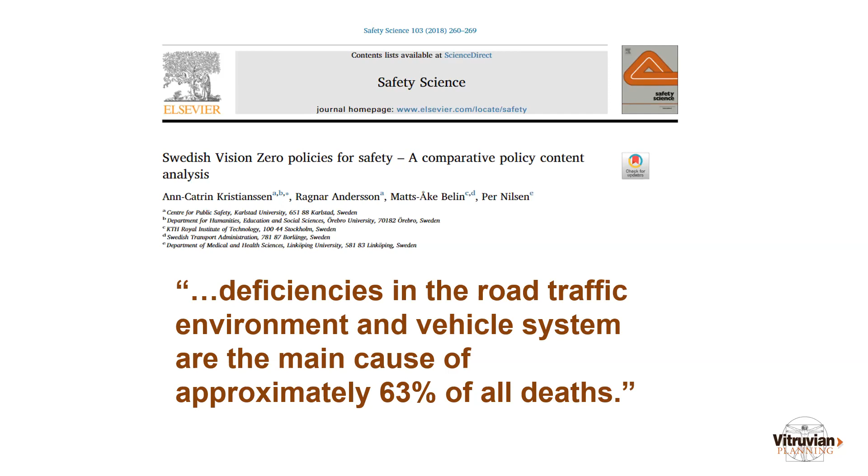And that's what this safety culture is meant to embody. And the science is starting to tell us this. Sweden, which has been a worldwide leader on Vision Zero and reducing traffic deaths, has realized that while humans may make mistakes, if we think we're going to perfect them, then we're fooling ourselves, because they found that deficiencies in the road traffic environment, as well as vehicle systems, are the main cause of approximately 63% of deaths. And when Sweden and the Netherlands adopted design strategies different from the US in the 1970s, they projected that if the US would have adopted it at the same time, our 45,000 traffic deaths a year would be cut in half. And that's what we're fighting and what we're up against.

So I'm going to address this from two different sides, because when we hear highway engineering or traffic engineering, we can confuse them as two things. I'm going to use these terms loosely, because in some ways they intermix. But when we talk about roadway engineering, I tend to think of that as the physical aspects - when we look at this cross section of a road, the subsurface features, things that we can't see, the road base, the drainage, the utilities, all those things that go into that are very much roadway engineering.

Surface features such as the crown of the road, so it drains, how the asphalt is done, and how the concrete is done on a sidewalk, is roadway engineering, as well as our bridges and other structures.

The traffic engineering side is markedly different. While this road may be 5 lanes and a roadway engineer is trying to make sure that those 5 lanes and everything stands up over time, it's oftentimes the traffic engineer or somebody giving input that will give input to the number of lanes, or the width of those lanes, or the widths of sidewalks, or the widths of bike lanes, traffic signals, how signals are timed, how the road is striped, the number of lanes desired, the presence of streets and other street side features, as well as speed limits and design.

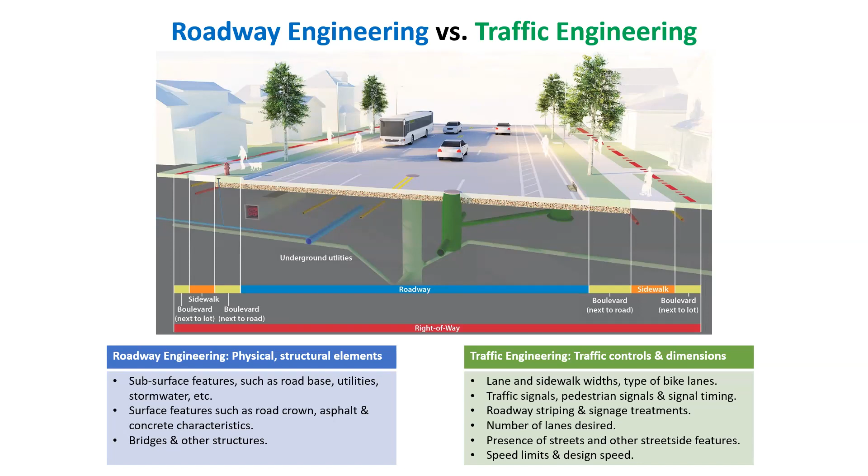And so these are two very different things to understand, because the guidance and policies used to guide the two do vary dramatically. In general, I will say this: the science related to traffic engineering is a lot less substantial than the science related to roadway engineering. And I think that's where we cause a lot of issues.

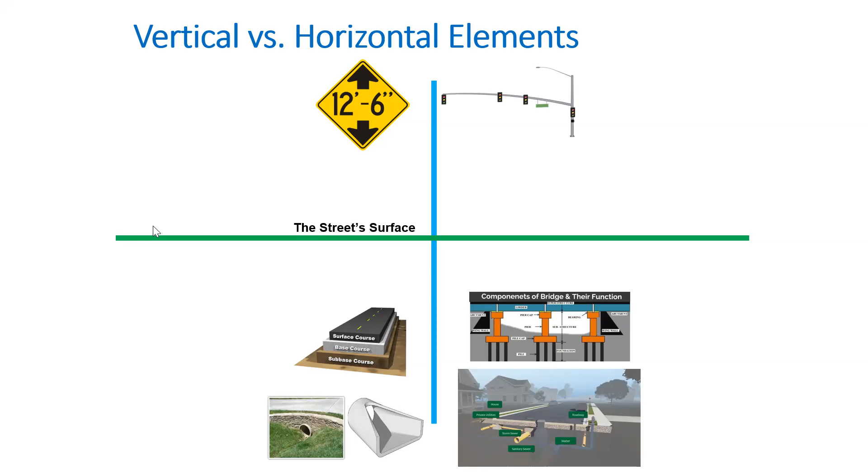And the reason I say that is when we look at the vertical and horizontal elements of a street, how it drains, the components of a bridge, the height of a traffic signal pole - those kind of things, in our world of trying to make things safer for pedestrians, bicyclists, and motorists, aren't really what we're questioning. We're not questioning the railing height of a bridge or the bridge pier or the subsurface base of a roadway. Oftentimes what we're trying to make better is the traffic engineering side of that.

Lane widths that are 12 feet that induce speed and are not compatible with urban or small town streets, or a turn radius at a corner that promotes high-speed vehicle turns and reduces the visibility of pedestrians - those are the kind of traffic engineering decisions that I think we are most focused on. And certainly in things like a curb extension or a raised crosswalk, that's where we get this traffic engineering feeding roadway engineering, and I think where some of the confusion comes in.

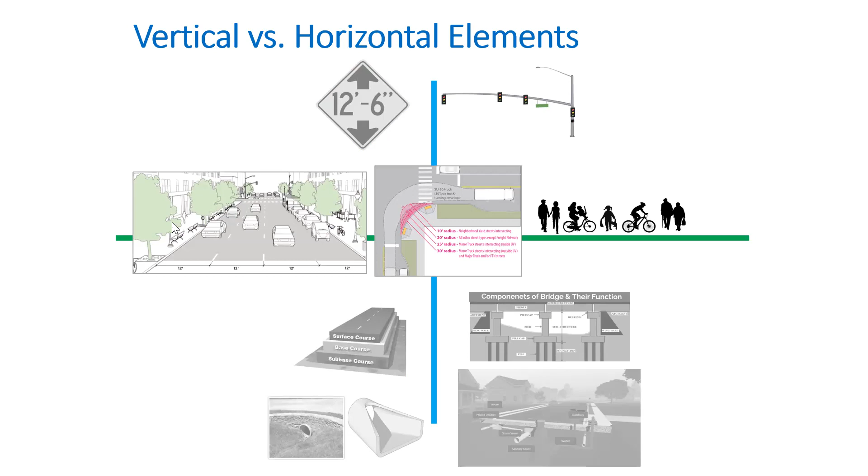So if we look at Merriam-Webster's definition of standard, there are several definitions, but I pulled out two of them. One, a noun, standard: something set up, and this important part, established by authority as a rule for the measure, quantity, weight, extent, and value.

An adjective of that is constituting or conforming to a standard, especially as established by law or custom. I think when we get into discussions, especially with an agency like an ITD, this tends to be how they define that. And when an elected official hears we follow a standard, I don't believe that elected official feels very empowered to question it.

I think this definition of standard and how it's applied by public agencies is used to squash changes or public input or prevent flexibility when ample flexibility is allowed. Definition B, also in the same dictionary, is something established by authority, custom, or general consent as a model or example, and something that might be regularly and widely used, available, or supplied. That, in my mind, is how we should look at things called standards when we do this.

And it's a simple fact. Not one standard developed out of Washington, D.C. for the entire country can address every single situation, but we tend to apply them as if they are.

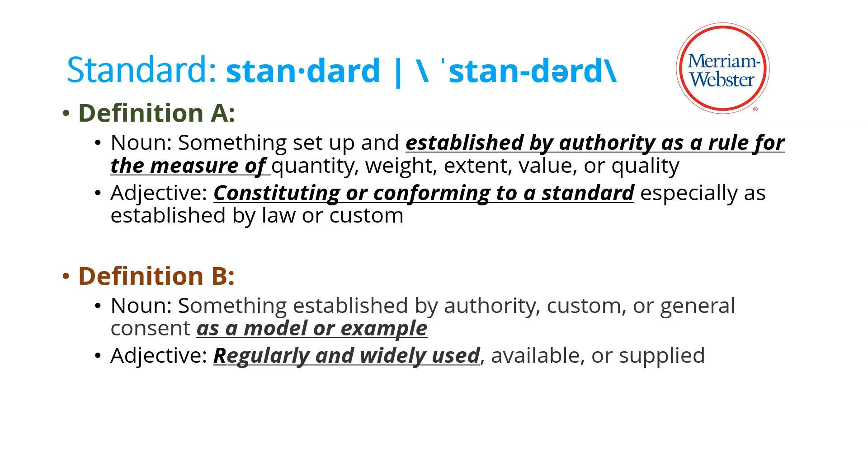So I'm going to start first with something you might hear. Hey, you know, we would really like a narrower travel lane and a curb extension. And you know what, we can deal with congestion for a couple hours a day because we'd rather promote pedestrian safety. And the excuse you might get is, well, we follow federal standards. We can't do that because the federal standards don't allow it.

Here's a little secret. For the most part, there are no federal standards that dictate those things. FHWA has indeed adopted some federal standards for things like interstate highways, which for the most part, we're not concerned with. And they do have standards for the national highway system.

Orofino, you're on US Highway 12. And while yes, that does have some authority there, your downtown and most of your city is not on that. And I'll address some of those issues here in a second.

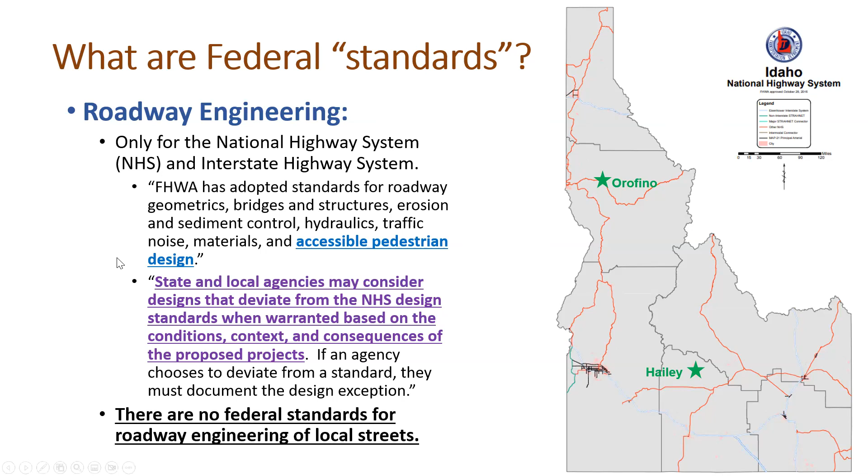From the traffic engineering side, it's slightly different. There is a document called the Manual on Uniform Traffic Control Devices, MUTCD. It is also oftentimes erroneously referred to as a federal standard, and I'll focus on that in a second.

MUTCD does include standards and things that are labeled as standards and things that have the word 'shall,' which is generally viewed as something that is compulsory unless you have good reason to deviate from it. What MUTCD does is it helps ensure things like a speed limit sign looks the same in Idaho as it does in Florida. It helps traffic engineers time traffic signals for at least a minimum standard for pedestrians. It does not prescribe a maximum standard for pedestrians.

And when you look in MUTCD, the very first section says that it contains not only standards, but also guidance, options, and support. And only about a quarter of what is in the 900 or so pages of MUTCD is actually a standard. The rest are things that allow ample flexibility to allow for local conditions and local context to prevail.

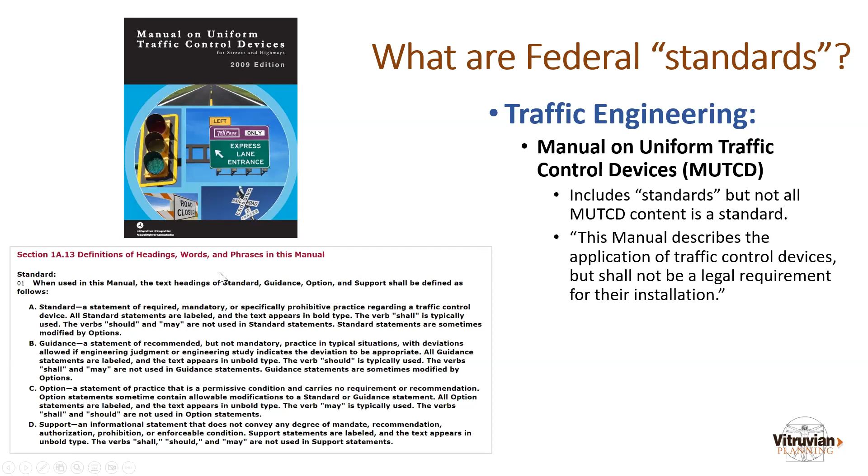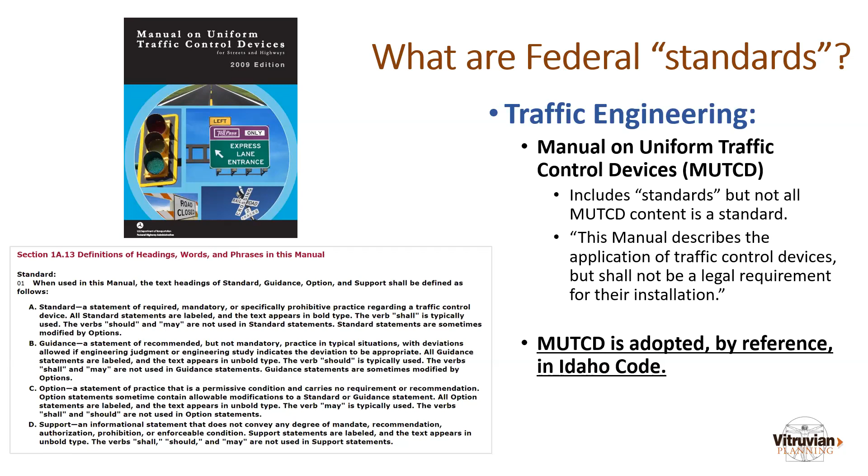MUTCD is adopted by reference in Idaho code, so there is some legal standing for it. It's something local agencies, ITD, and others have to follow, especially when it comes to things labeled as standards. But you'll often hear, we follow MUTCD standards, and as an advocate I would say, which ones? Because there are plenty of other options and guidance that are not standards and do allow for the flexibility you may seek. On the roadway engineering side, you'll also hear, we follow AASHTO standards.

Generally that comment is meant to reflect this document, A Policy on Geometric Design of Highways and Streets, often called the Green Book. It's more than 1,000 pages and covers many facets, primarily focused on roadway design, but it does incorporate some traffic engineering principles into it, and I'm going to cover what that is.

So first of all, who is AASHTO? They're the National Organization of State DOTs. The Idaho Transportation Department's executive director, by rule of AASHTO, has a seat on its board, plus engineers at ITD sit on AASHTO's numerous committees. They publish guidelines and research, including the Green Book I mentioned, but also bicycle and pedestrian guides and something called Achieving Flexibility in Highway Design.

They also do a lot of what's called materials testing, to test the substantiality of concrete and other things that are very important. But let's not forget, AASHTO is a very powerful lobbying organization when it comes to federal policy, federal funding, and how federal projects are done. Don't underestimate the biases that are inherent in that.

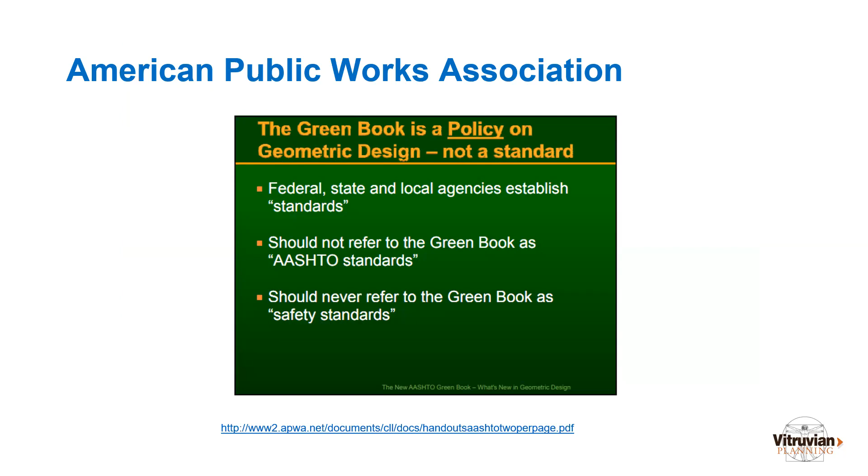This is from a presentation by the American Public Works Association that says it better than I ever could: the Green Book is a policy on geometric design, not a standard. Standards are established elsewhere by other agencies. We should never refer to the Green Book as AASHTO standards, and we should never refer to the Green Book as safety standards. Again, that's not Don Kostelec talking, that's the American Public Works Association.

So where do standards exist? As I said a couple times, state DOTs like ITD and cities like Hailey and Orofino may adopt their own set of standards, which can at times be viewed as inflexible. But the great thing is, especially for a city, we can adjust, amend, and adopt new ones at any time, in a much easier process than even a state or federal level. Many of these standards are based on AASHTO's guidance, but as I found in reviewing them, they're probably outdated, or they do things like use a maximum design value for travel lane widths.

They will default to 12 feet on a travel lane width, but oftentimes default to the minimum width for a bike lane or a sidewalk.

This is why I oftentimes push back at ITD or other agencies when they say, well, we don't have any money, and that's why we're building the 5-foot sidewalk. Well, if money was truly the problem, and you have to build a minimum sidewalk, why are you not also building a minimum travel lane?

Why are you not building minimums in other facets of the road? Why do pedestrians and bicyclists get relegated to the minimum while oftentimes they build the maximum for motorists? That's a bias, not a standard that we've applied through many of these things.

It's also likely that the AASHTO bicyclist and pedestrian guides were not incorporated into a city or state DOT's design standards. And I'll give you an example of this later as it pertains to ITD.

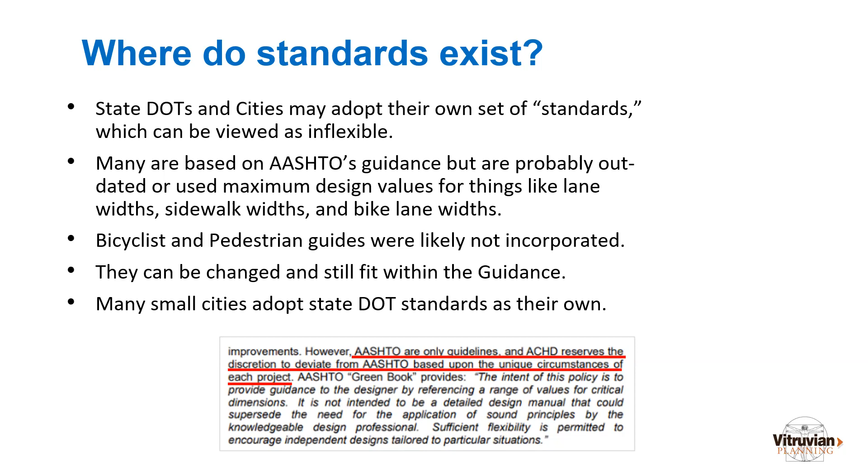It's not saying a value in there is necessarily good or bad, but there is ample flexibility and we can do a lot better job applying that.

State DOTs, not just Idaho, misuse that term. This is an excerpt from a state DOT's design manual in another state where they say critical design elements not meeting AASHTO standards require an exception. And these critical design elements are, you can see there. That's a misuse of the term.

In this city design manual, and this is a city I would hold up as one of the better ones from a pedestrian and bicyclist standpoint, they still erroneously use the term standards when applying to AASHTO elements when it's not. So don't think that Idaho is alone or unique. This is an industry challenge.

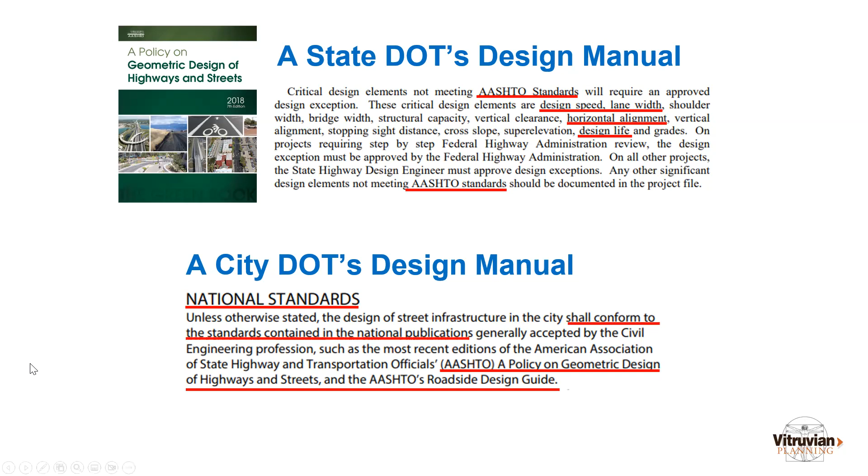So let's look at this based on what you've learned. ITD's Roadway Design Manual. Just Google that and you will find all 500 or so pages of it in all its glory. So tell me, all work performed on interstate pavement preservation projects must meet AASHTO standards, but other previously built areas of the roadway do not need to be brought to current standards. Is ITD correct in this instance using the term standards?

Yes, they are, because the Federal Highway Administration has specific standards for interstate projects. However, there's also an entire manual on how agencies like ITD can get design exceptions for the interstate highway system. So even what may appear to be written in stone is not written in stone.

Elsewhere in the ITD Roadway Design Manual, not pertaining to interstate highways, recommended roadway widths based on completed corridor plans or by applicable standards. The request for a width design exception to AASHTO standards cannot be solely based on this justification. This is an incorrect use of the term AASHTO standards because it is not in reference to an interstate highway or national highway system. It's reference in general.

So if you're an ITD project engineer who doesn't get to design this manual and you're assigned to a project in Hailey or Orofino and you see this, are you going to feel like you're empowered to be very flexible in addressing that? Probably not. And that's where the problems tend to lie.

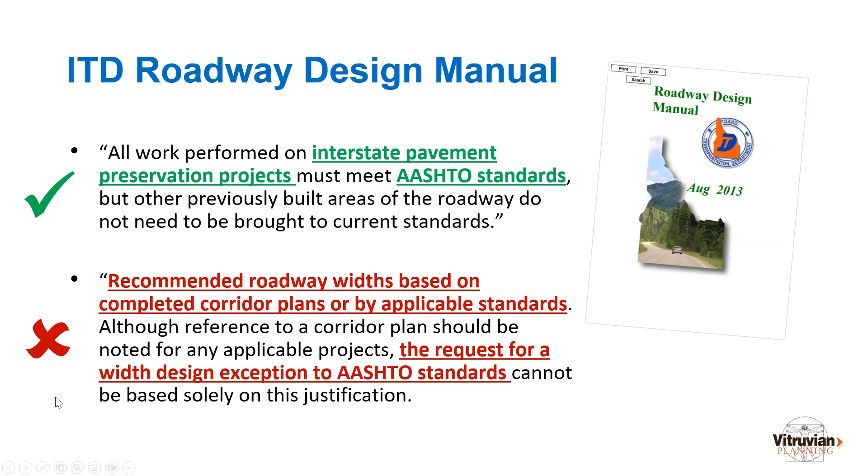So let's go back to AASHTO. If we think of a standard as using the word 'shall,' which makes it compulsory, consistent with what I said with MUTCD, I'm lucky enough that I have a PDF version of the AASHTO Green Book, and I can do a search within about a minute across all 1,000 pages.

And here's another little secret. The word 'shall' does not appear anywhere in the 1,000 pages of the AASHTO Green Book, which is why calling this AASHTO standards is simply incorrect. So let's look at what the Green Book does say that can help us reach our goals.

This policy is not intended to be a prescriptive design manual that supersedes engineering judgment by the knowledgeable design professional. A single book of 1,000 pages cannot dictate every circumstance on a street in the United States. Projects on existing roads particularly call for a flexible performance-based approach to design, and the policy encourages flexible design.

They even admit that in the past these things were applied too rigidly. The last sentence underlined: traditional applications of this policy took the approach that if the geometric design of the project met or exceeded specific criteria, it would likely perform well. Well, got news for you. Most of our highways have conformed to this in some form, and we still lead the wealthy nations of the world in traffic deaths. So have we accomplished our goals for safety by rigidly applying this?

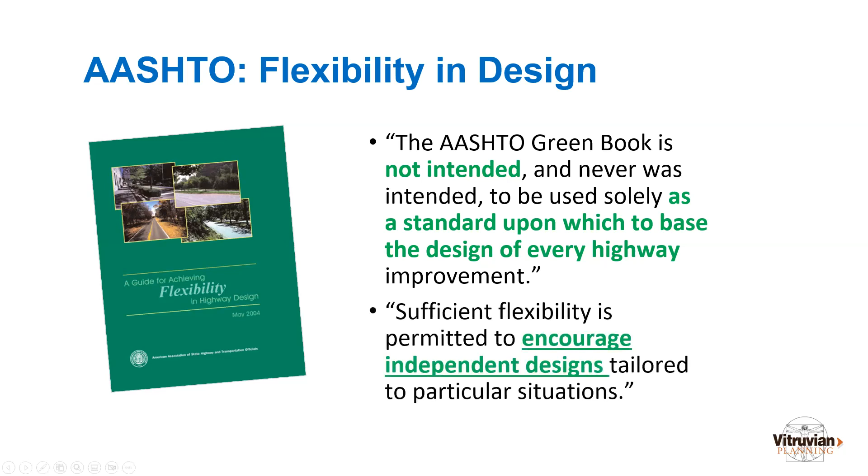I say no, as does AASHTO. AASHTO had to go out because their own Green Book was seen as so inflexible, and publish another 140-page guide to explain how the Green Book is indeed very flexible. This is a quote from this flexibility guide: the Green Book is not intended and never was intended to be solely used as a standard on which to base the design of every highway improvement. Sufficient flexibility is permitted to encourage independent designs.

So here's where I'm going to bust some myths. We will hear often that we have to have 12-foot lane widths, and I've even seen in some LHTAC presentations participants led to think that you need 12-foot lanes on your local residential streets. Maybe they'll be nice and give you 11, but they act like they're moving heaven and earth to do it.

What does AASHTO say? AASHTO says the normal range is 9 to 12 feet. And for arterials like state highways through the middle of town, 10 and 12 foot lanes are appropriate. This is directly from AASHTO.

There is less direct evidence of a safety benefit associated with incrementally wider lanes in urban areas, and values for lower speed urban street lane widths are less rigorously devised. That's AASHTO saying that for the most part, what we publish is meant for interstate highways and rural routes. They haven't historically addressed urban streets.

So when somebody tries to say, well, if we go narrower than 12 feet, it's a safety problem on an interstate highway, on US 12 between cities, yeah, I can see some of that. But that does not apply to your local urban streets.

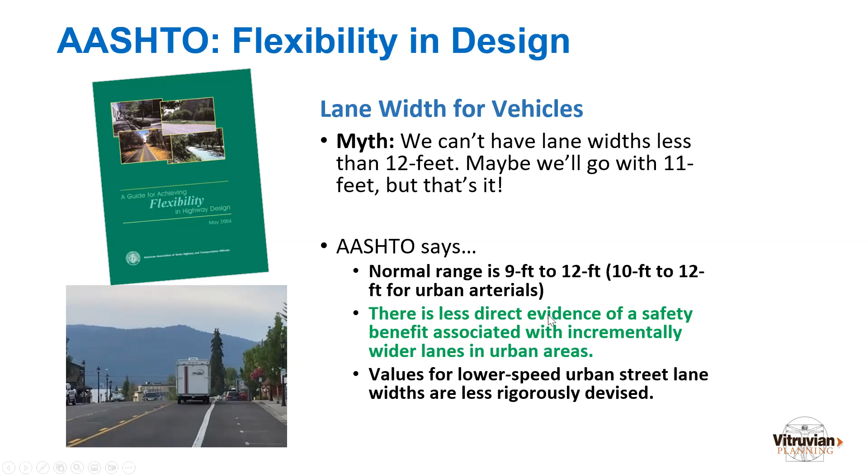ITD's roadway design manual has some of this bias baked into it. For non-national highway system urban streets, they have this in there: travel lanes, minimum 10 feet, desirable 12 feet. They don't call it maximum feet.

So again, if you're the engineer assigned to a project in Orofino or Hailey and you see this, if 12 is desirable, what is 10? It's undesirable, and you have to get an exception to do it.

You'll also notice in this, there is nothing about what the best minimum or desirable width are for sidewalks and bike facilities. It's not even addressed in the same tables. So if you're that design engineer picking this up, is that going to be your first consideration? Or are you going to consider bike lane presence and sidewalk presence and debate and determine how to best measure the trade-offs? Or are you going to just default to what's a 12-foot desirable?

This one kind of cracks me up too, an 8-foot minimum, 10 desirable on parking lanes, which is both very excessive, especially for urban streets.

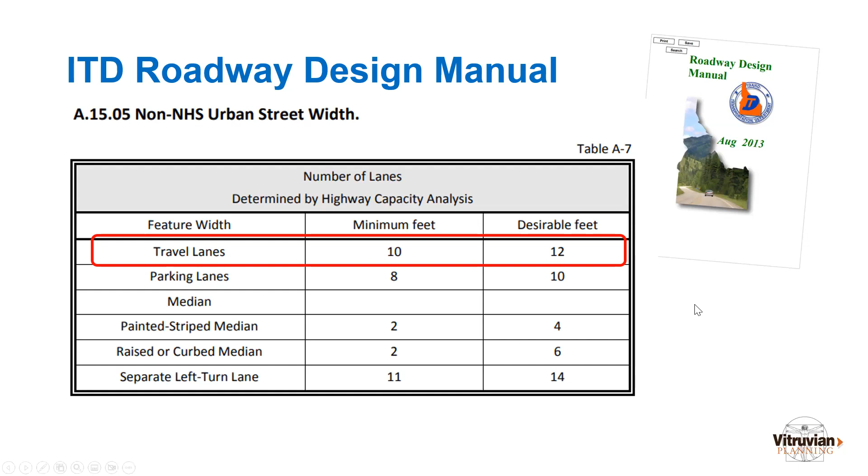Another one is level of service. Oh no, we can't do that for pedestrians or bicyclists because we have level of service standards to meet for drivers. And if you don't know level of service, it's basically an unfortunate grading system about traffic flow. How many of you enjoyed going home to your parents and telling them you got an E or an F on a test? We didn't, right?

And oftentimes this level of service F, which is forced flow and excessive delays, is unfortunately referred to as failing, and it is not. We also hear that, hey, if I don't accommodate level of service, I could lose my engineering license. Not true.

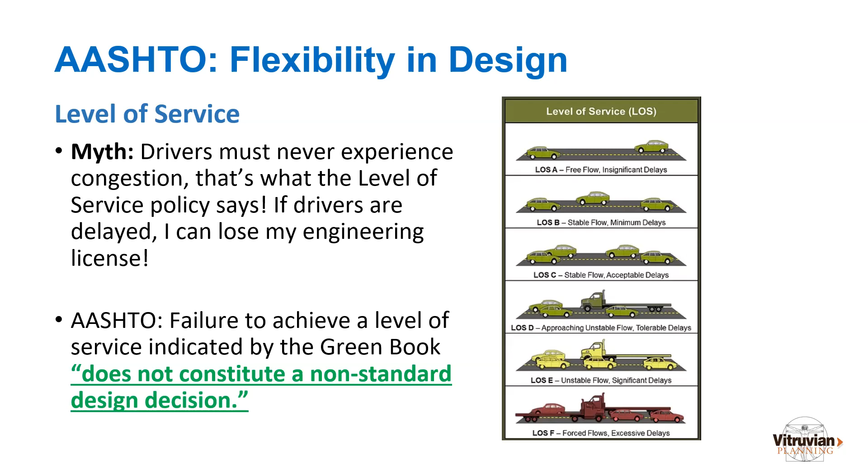AASHTO says failure to achieve a level of service indicated by the Green Book does not constitute a non-standard design decision. Bring that home to ITD, and they have, again for non-national highway system stuff: in some cases, the recommended, not a standard, level of service becomes prohibitive and a lower level of service is acceptable.

Justification must be documented. So how many times have you been in a meeting where they say, no, we can't do this, we can't do that? Well, go read their own state design manual and you'll find plenty of exceptions are allowed in that.

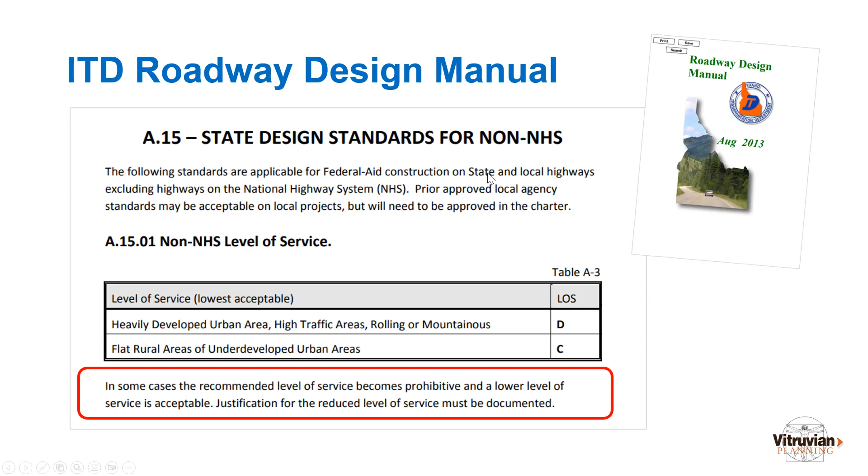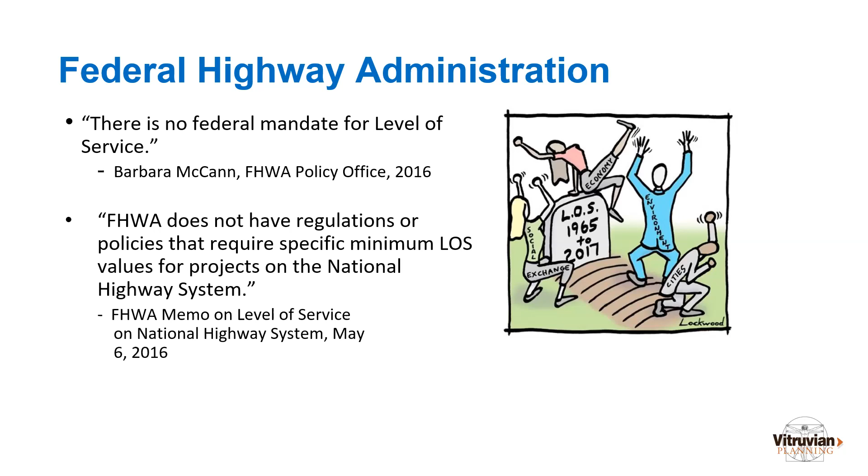Federal Highway Administration has also said, and is on the record, there is no federal mandate for level of service, and they do not have regulations that require specific minimum level of service for projects on the national highway system. So if Orofino, you're being told we can't do this for pedestrians because of vehicle level of service, there is no such standard that exists for that.

ITD, to their credit, does have what's called a context sensitive solutions design manual. And I'm convinced that most of their staff don't even know it exists. They have goals in there to integrate the transportation system where we have, guess what, modal choices beyond private vehicles, that we examine the economic, social, and environmental health of the state, and that we are flexible and must be open to options, opportunities, and community input as time passes.

Just because State Highway 75 through Hailey was built some way 30 years ago doesn't mean it still serves that function for the city today if we look at economic, social, and environmental health. Maybe it does, but let's explore that in many ways. And I know that's been a conversation, a very complex one. I'm not saying it's easy for that.

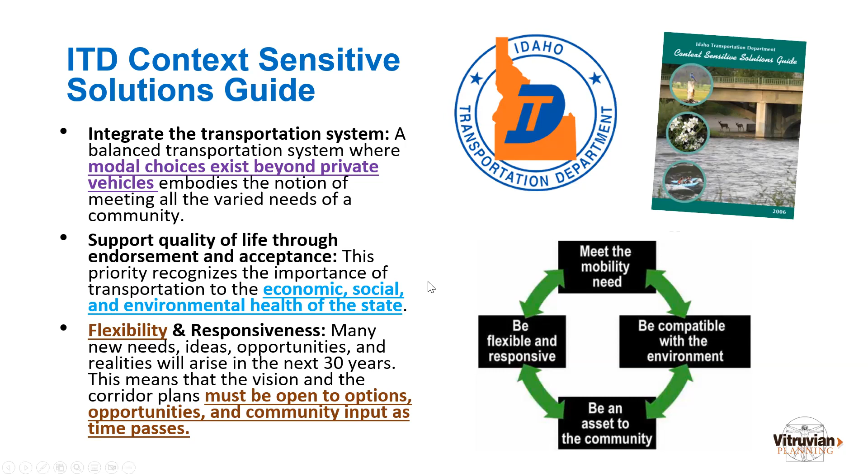Finally, a couple things on this, concerns over liability. Well, we'll get sued if we don't follow the standard. That's not entirely true. When you do get an exception to a standard, whether it's an MUTCD or anything else, the important thing is to document why it happened, because as all of the text I've shown you says, that's logical. When agencies get sued, it's not because they deviated from a standard, it's because they didn't document why they did it. So that's another important piece.

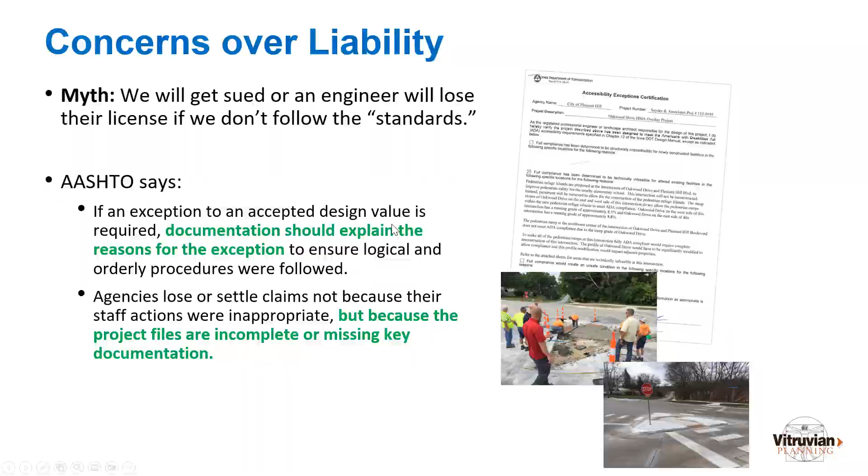So these guidebooks by AASHTO and stuff are all out there. Unfortunately, like I said, the AASHTO ones cost money, but there are other Federal Highway Administration endorsed guidelines like the ones on the bottom line that are free and you can get them in PDF.

So now I want to address traffic engineering. So we'll move over to kind of the signals, the striping, the signs, things like that. Remember what I said, MUTCD is not a standard, but it includes standards. And this is the definition straight from the good book about that.

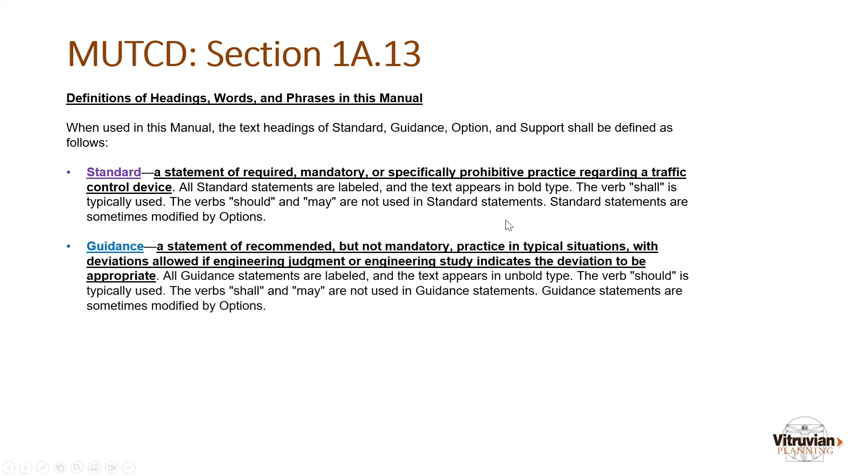Standard: a statement of required, mandatory, or specifically prohibitive practice regarding a traffic control device. Yep, if we ask for a deviation from a standard from an engineer, we can see why they're going to be reluctant to do that, and understandably so. But like I said, that's only about 1 in 4 statements related to this traffic engineering practice in MUTCD.

Many statements in there are guidance. It's a recommended but not mandatory practice in typical situations, with deviations allowed if engineering judgment or study indicates it to be appropriate. Standard statements use the term shall. Guidance statements use the term should. That's very different in how it's interpreted.

Unfortunately, my experience has found when MUTCD says something should be done and it relates to making something safer for pedestrians, it's unfortunately given too many traffic engineers the out clause to say, well, I don't have to do it and I'm not going to do it. And I think that's a cultural issue we're having to fight.

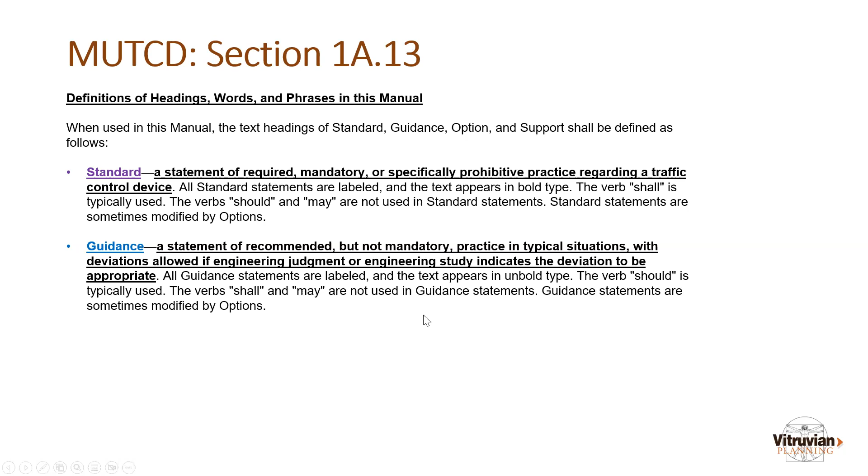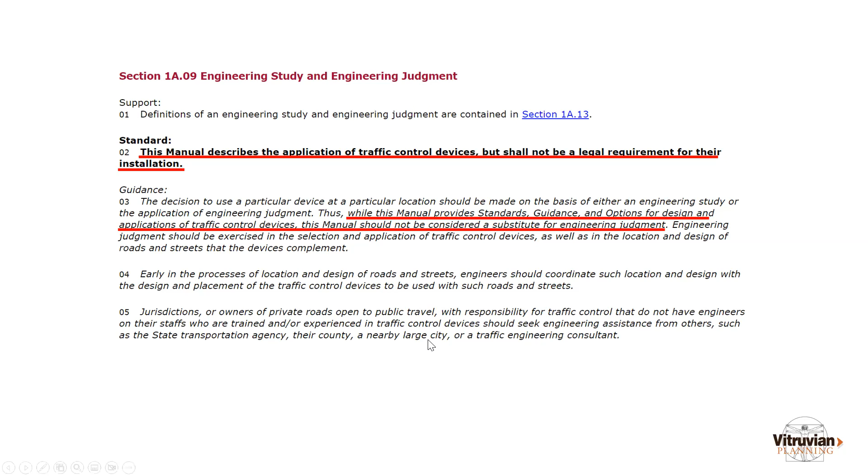In MUTCD are also options and support in other ways, and I'll give you an example of what that means in a second. Even within that, even within standards and federal endorsement and adoption in Idaho code, MUTCD still says this: the manual describes the application of traffic control devices, but shall not be a legal requirement for their installation. And while this manual provides standards, guidance, and options, this manual should not be considered a substitute for engineering judgment, which is meant to say there's flexibility for local conditions, and just document it when you deviate from them for very good reasons.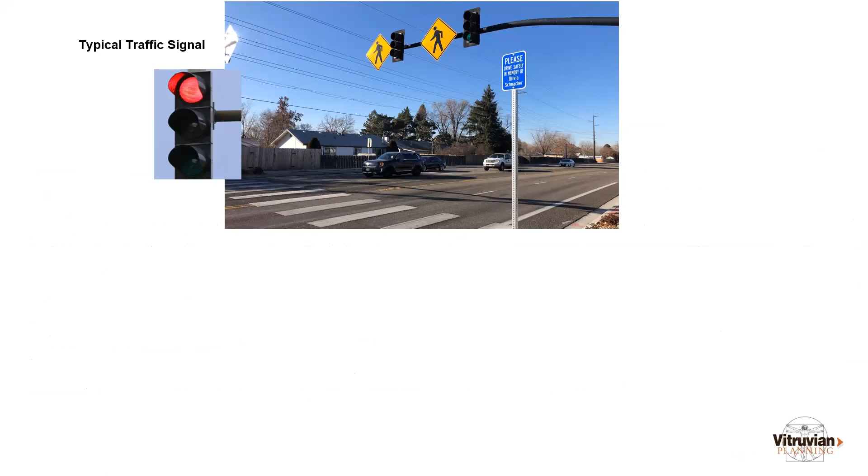So let's look at a typical traffic signal. Hey, we want to signal in Orofino or Hailey to help pedestrians get across the street. A typical traffic signal that we all know with the red, yellow, green lights is something that is very heavily regulated with lots of standard statements in MUTCD. Traffic signals require something very stringent in order to justify their installation, and that is called a warrant.

And so certainly you can see here under the standard, 'shall be considered.' To justify a dedicated traffic signal only for pedestrians—this isn't talking about a traffic signal at an intersection of two streets—you've got to meet some pretty high criteria, something on the order of like 120 pedestrians an hour. And where in Orofino are you really going to find that, right?

So if we go to ITD and say, well, we want a pedestrian signal out here, they might just come back to you and say, well, it doesn't meet a warrant. And you know what? They're probably right. But what if you ask them, we want a safer crossing treatment for pedestrians across US Highway 12 in Orofino?

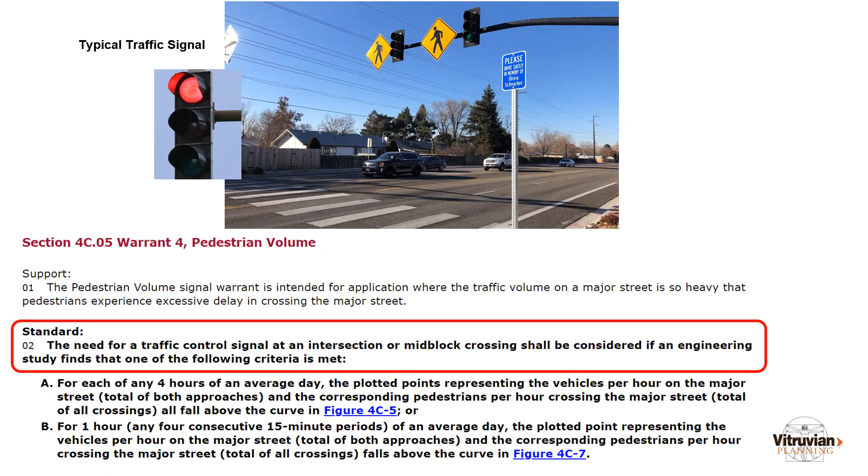That's a very different question, because we have something like a pedestrian hybrid beacon or a HAWK signal. The word warrant is never used for this type of signal, and that means you don't have to meet the thresholds in their guidance table on pedestrian crossings.

And this even says that under option 2, a pedestrian hybrid beacon may be considered for installation at a location that does not meet the traffic signal warrant that I showed you in the previous one. And the only place this says a standard related to that is they shall be used in conjunction with signs and pavement markings and shall only be installed at a marked crosswalk.

That doesn't mean a pre-existing crosswalk. That means if you put one of these in, you also have to mark a crosswalk that's there.

Things like rapid flash beacons—and I know you guys had this issue in Orofino at the end of your pathway where an ITD board member was told that there aren't enough cars or something—there are no rules for that. That is 100% the judgment of the engineer in doing that. There is no set threshold of pedestrian crossings, vehicles, speeds, or anything else for that.

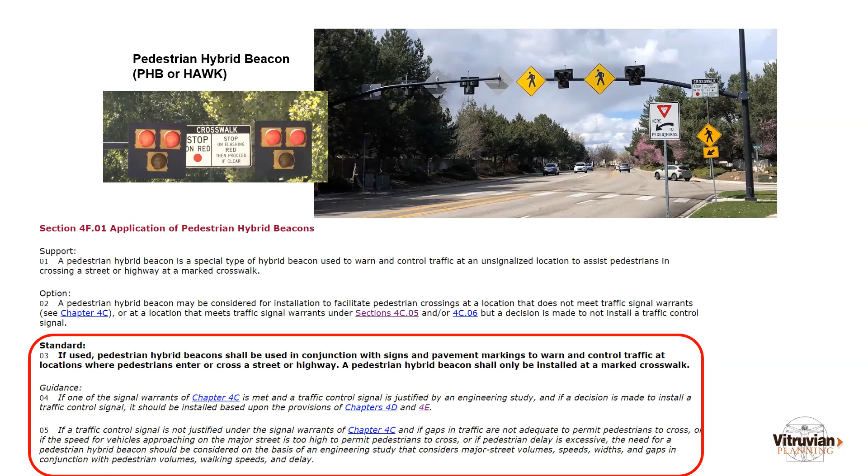And so go back: do you want a signal for pedestrians, a traffic signal on Highway 12 or Highway 75, or do you want a safer crossing? Depending on how you ask the question means the different things we can explore here.

A couple other myths, speed limits. And I know in LTAC's training, they only teach it as if the 85th percentile—a mark at which 85% of vehicles are traveling at or below—is how to set the safest speed limit. Not true. The 85th percentile is only mentioned as an option, not a standard.

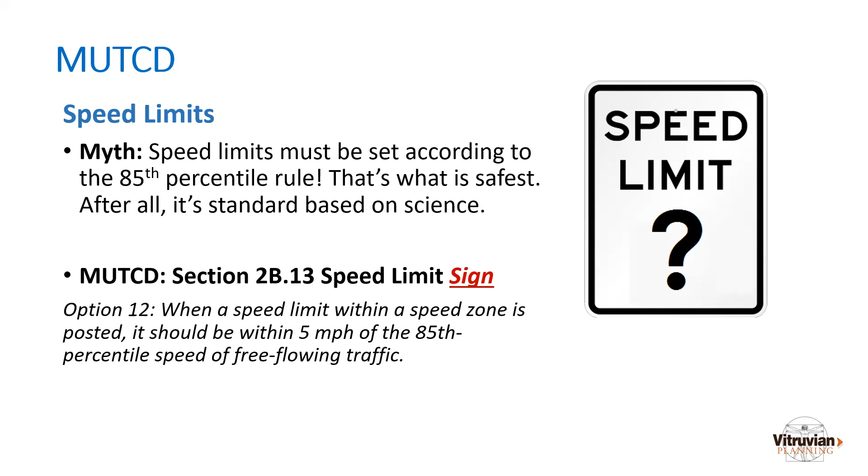And it's not about setting speed limits, it's in a section on speed limit signs in MUTCD. I'm not going to belabor this a ton, but the National Transportation Safety Board looked into this, because using this 85th percentile to set speeds in urban areas is a big contributor to our pedestrian and bicyclist death rates. It was developed on rural highways in the 1950s, and pedestrians, bicyclists, and other things were never a part of it. Even the National Transportation Safety Board says it is dated research and may not be valid under scrutiny.

So I ask you this: if the National Transportation Safety Board, which you probably know mostly from investigating airplane crashes, came out and said that the things that occurred for this particular commercial airliner that crashed and killed a lot of people—what we applied is not based on research and may not be valid under scrutiny—would you fly that airline if they said, no, we disagree with NTSB, we're going to keep doing it? That's what's happening in the highway engineering industry right now. This caused a lot of consternation because we've been so ingrained that this metric is what's used for safety, and it's not.

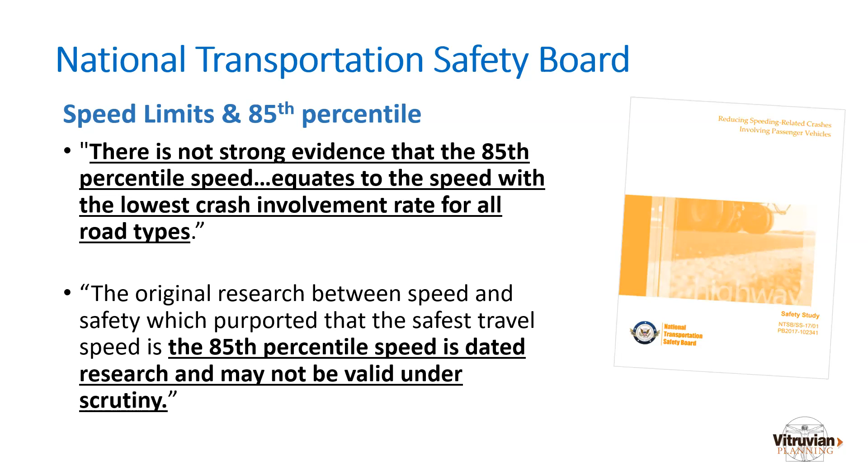Some other things in this report: NTSB recommends removing even the guidance in MUTCD on setting speed limits within 5 miles per hour of the 85th percentile, and stresses using tools like USLIMITS2, which let engineers use the 50th percentile or average speed when pedestrian and bicyclist safety is a factor. We have the flexibility for that. The 85th percentile is not a standard, but it's used as one.

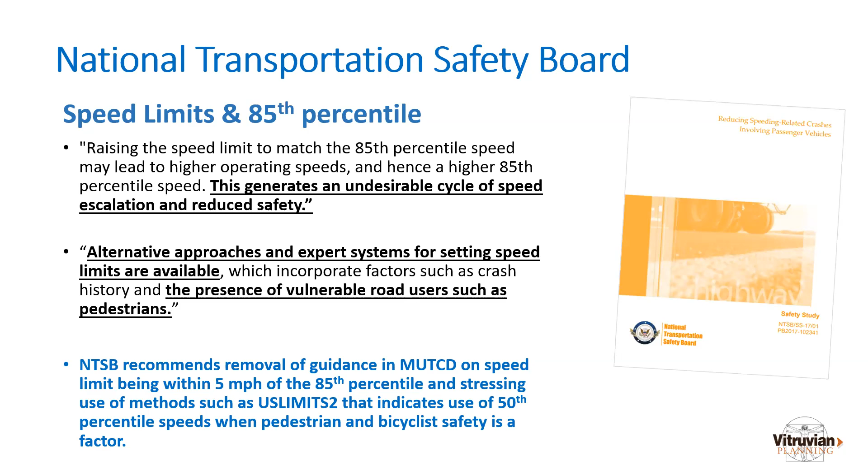So here's one final real world example to tie these things together that I think you might be able to apply in your situation: we want a safer pedestrian crossing with some type of signal, other than just a marked crosswalk, across a 5-lane road.

I'll use Chinden here in Boise as an example, since we've used this a lot. Most people, if this woman got hit, would say she's jaywalking, when in fact, under Idaho law, she's legally in a crosswalk—it just happens to be unmarked. But if we expect everybody to obey the law to keep pedestrians from getting killed, going back to my culture of safety, we will all fail.

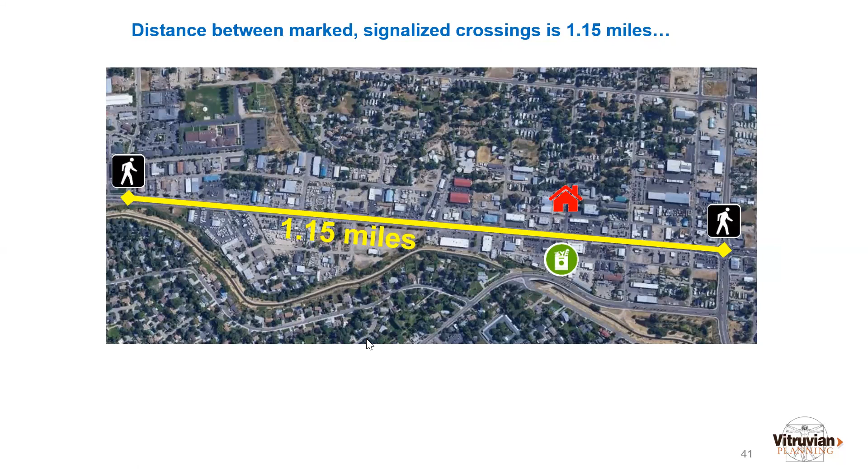So we have a neighborhood, you can see it up top with the trees, and a grocery store right across this highway called Chinden. There's 1.15 miles between two adjacent traffic signals that have walk signals, with no other marked crosswalks or any other protection or indication for pedestrians in that entire stretch. Out on US Highway 12 between Lewiston and Orofino, that's probably fine, but this is an urban area, and the land uses here would justify considering something more.

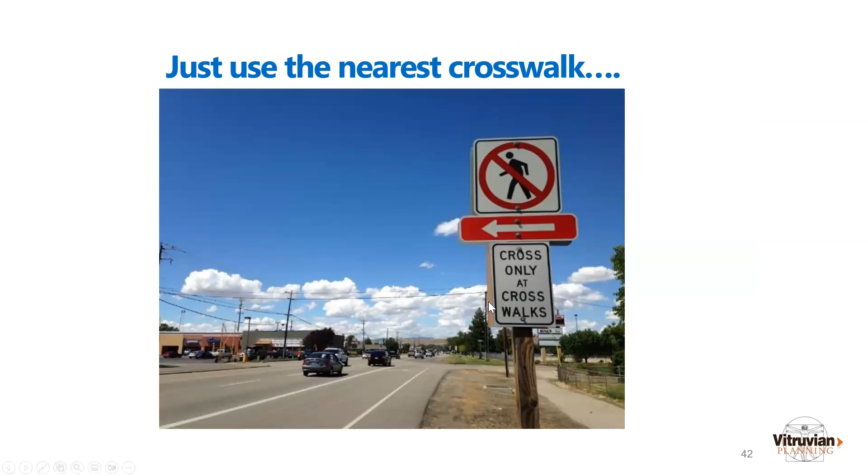And we often hear, well, just go to the nearest crosswalk, you pedestrians—just walk down to those signals, they're there for your safety. So let's take a look at that.

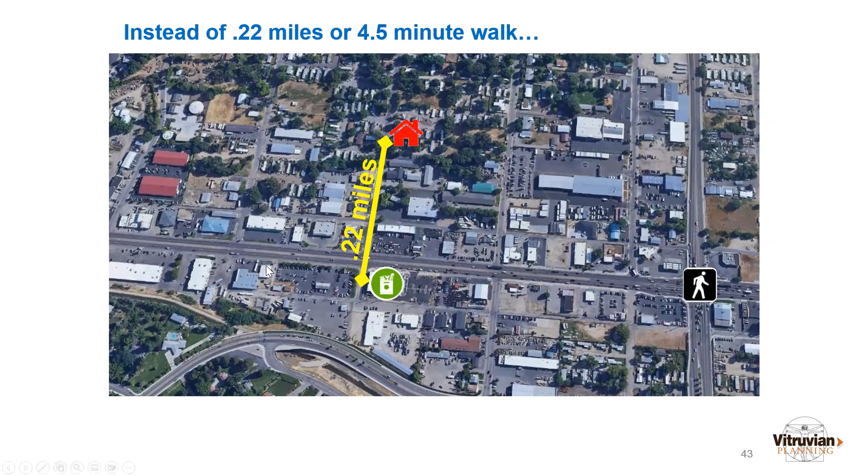As the crow flies, if somebody wants to walk from this neighborhood to the grocery store, it's only about a 4.5 minute walk—that's what most people would do. But what does the highway and traffic engineering of our street ask us to do instead? It asks us to go 1.05 miles just to cross the street to get there. And somehow that's a valid expectation in the world of engineering.

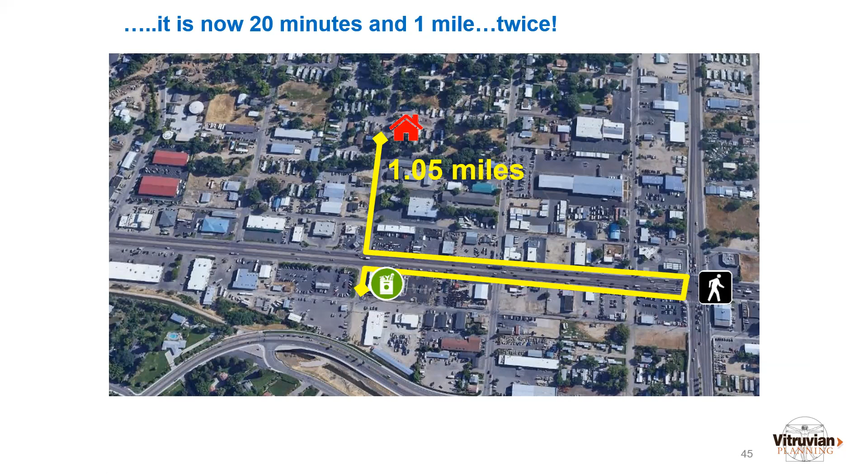Not only are we asking people to walk 20 minutes one way just to cross a street, when we do that we're putting pedestrians into 21 additional driveway and street conflicts. We have things like flashing yellow arrows that allow a motorist to shoot the gap in traffic, all while a pedestrian has the right of way. We've had deaths in this state because of that.

We might also make pedestrians wait up to 3 minutes at that nearest signal, so we could have a 25-minute walk one way, depending on how we hit that light—and our risk is a lot greater.

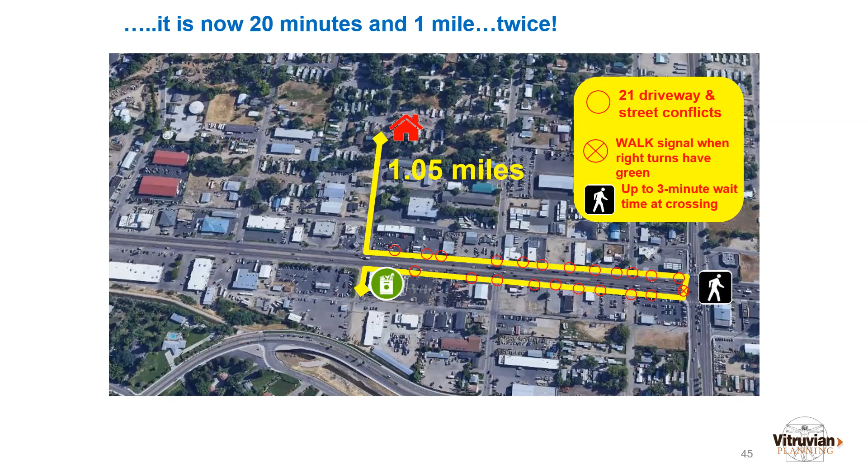So you might get a response that says, well, we can't put a crossing where you want it, it doesn't meet a standard. Hopefully from what you've learned, there is no such standard, and there are plenty of options.

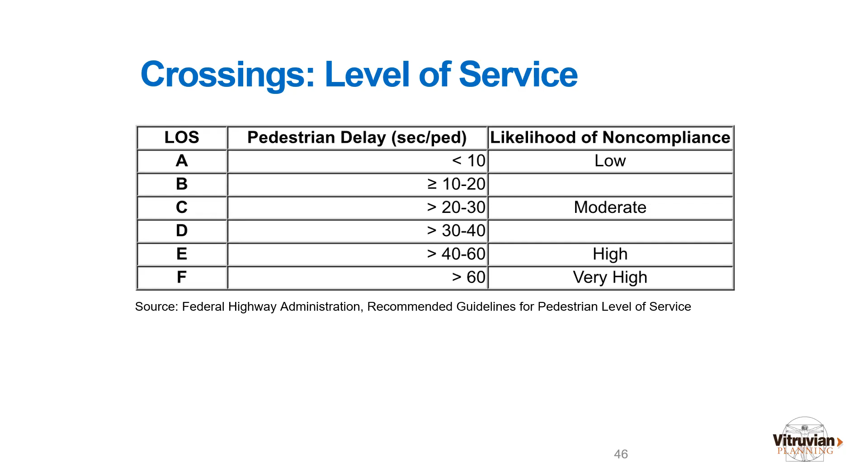Now let's get into the AASHTO pedestrian guide to bring this home. It was just published in December of 2021, and I'll say it's fantastic—there's wonderful stuff in there. By the way, it's also signed, endorsed, and reviewed by ITD, so they can't claim they don't know what's in it.

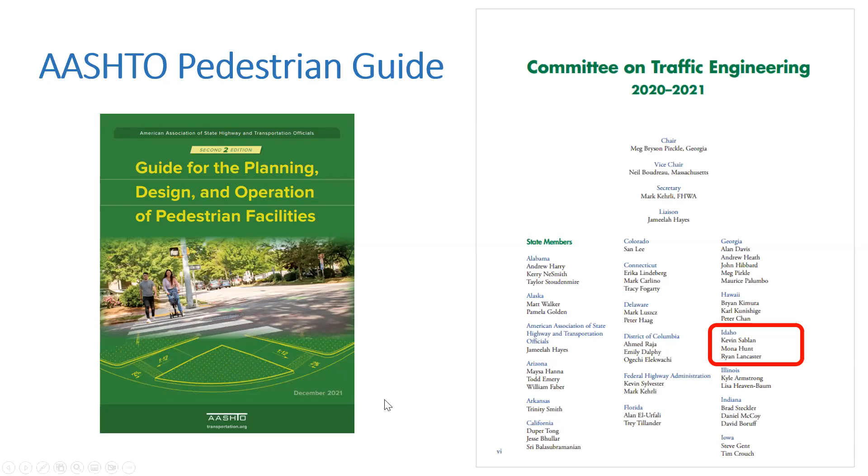Here's what AASHTO says about this hypothetical crossing we're talking about: the environment should induce drivers to travel at low speeds. Wow, that points directly to engineering. It doesn't say speed should be based on the 85th percentile.

Generators and destinations. Pedestrians will not typically go out of their way to cross the street at another location unless that location provides a safer opportunity and is reasonably close. And this is the one I love, frequency. Unlike motor vehicles, pedestrians cannot be expected to go more than a half block out of their way, about 300 feet in urban areas, to take advantage of a controlled intersection.

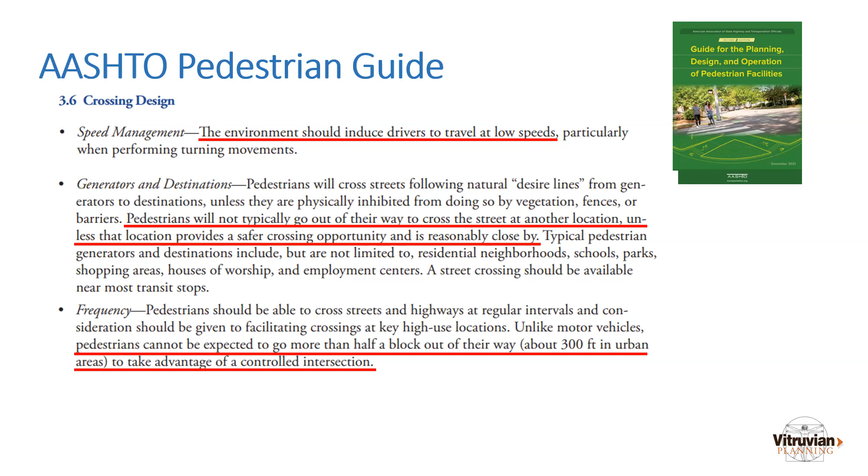And by controlled, that might mean a four-way stop, a rapid flash beacon, a pedestrian hybrid beacon. This is not Don Kostelec talking, this is AASHTO. Many view this as the standard, even though it's not. But when you hear AASHTO talked about as a standard for cars, it also says wonderful things about pedestrians that never get applied so sacredly as what AASHTO says oftentimes for cars.

Mid-block crossings. Pedestrians have a strong desire to cross streets at locations close to their intended path. Mind blown, right? And we should look at this where spacing between adjacent signalized intersections exceeds 500 feet. In that Chinden example I gave you, it's 1.15 miles.

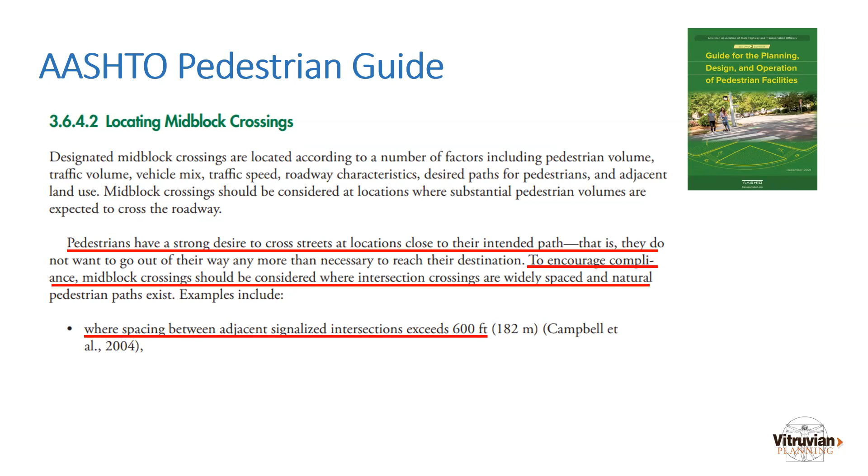There's clearly justification within AASHTO. We don't need signal warrants for a full pedestrian signal. We can do a pedestrian hybrid beacon. So please don't hide behind standards when trying to deny our request for a safer crossing. Pedestrian hybrid beacon, it repeats, traffic signal warrants do not have to be met.

So let's ask yourself, what's the driving equivalent? Pedestrians, just go to the nearest signal. It's okay that you have to walk 20 minutes out of your way just to cross a street. Would we ever make a driver go 4.8 miles and 20 minutes out of their way to make a U-turn and cross a street? Oh, heck no, that wouldn't meet these mythical standards that are out there.

But this is what we ask pedestrians to do all the time. And in the end, we blame them if they cross there, and we blame them even more if they get hit, even though the engineering is what prompted it. And we have ample flexibility in our federal design guides to accommodate that safer movement.

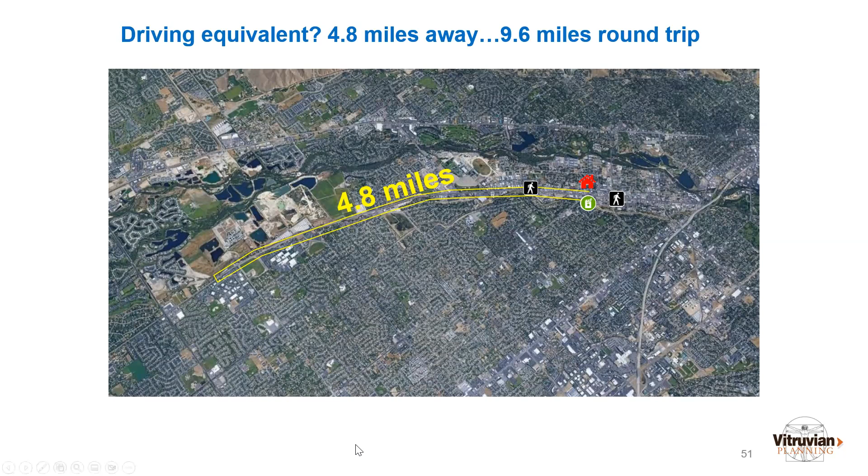So what can you do? Advocates and citizens, fundraise to buy copies of these guides for yourselves and cities. Have your library get a copy of these guides for their reference desk so you can go look at them. City planners and engineers, get copies of these guides and understand the full breadth and depth of what they contain.

Don't rely on ITD standards and use engineering judgment for the good of everyone. Just document and justify why you made the decision, and there is no threat to your license and to your city's liability.

For metropolitan planning organizations, neither of you have those, but Twin Falls, for example, is getting one. Lewiston has one. They can adopt planning goals that incorporate references to these design guides and make sure that agencies submitting projects base them on that. That is well within their authority.

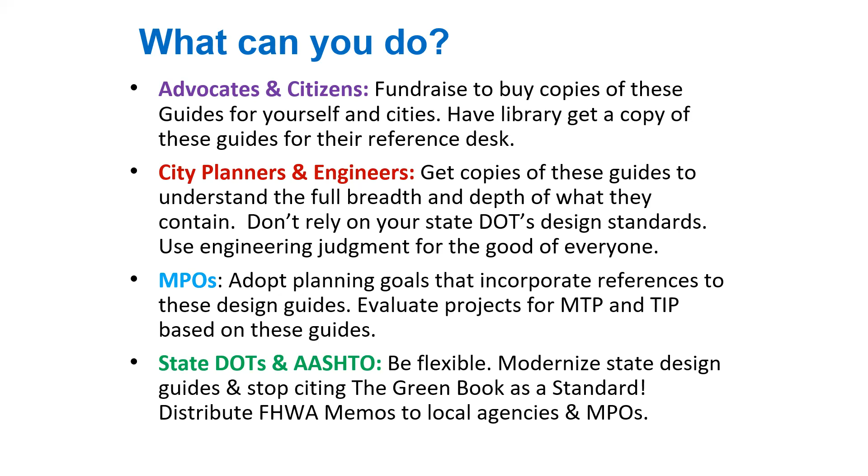And for state DOTs, be flexible. We hear it, we read it, but I would say we've all experienced very recently inflexibility in trying to achieve these types of things. So a couple of recaps.

Just because a street or intersection or pedestrian crossing, quote, meets a standard, that doesn't mean it's safe. Standards really only work to shield an agency or an engineering entity from liability. That's where the difference is.

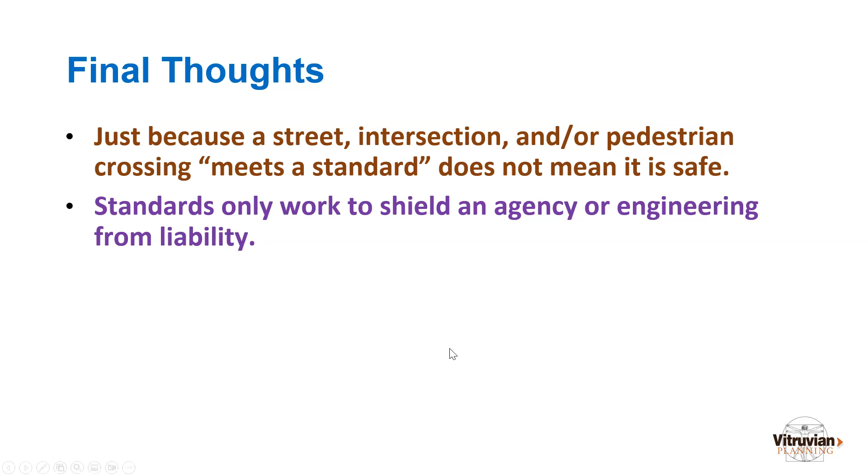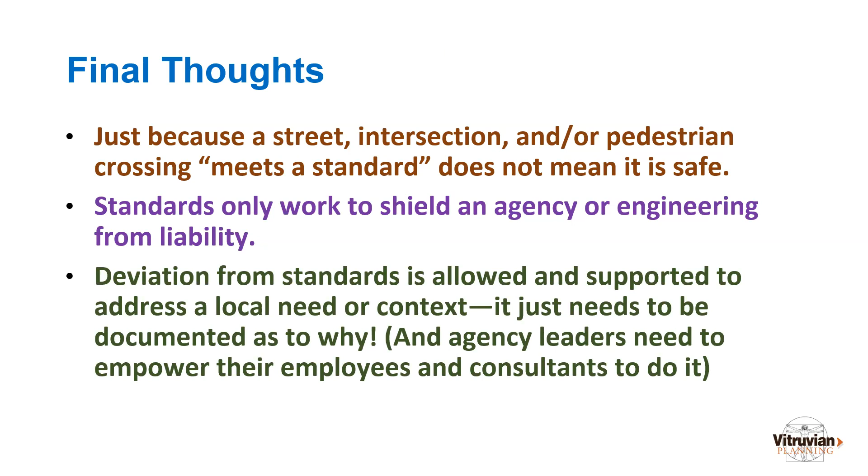And deviation from the standards is allowed and supported to address local need or context. We just need to document it, and agency leaders need to empower their employees and their consultants to do it at the same time. So with that, I will certainly stand for any questions.

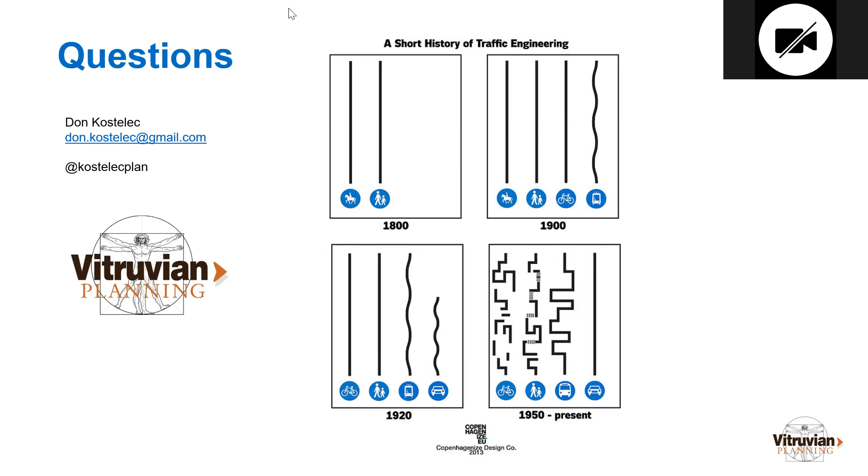Yeah, there is general guidance on the topic, and four-way stops and stop signs can be heavily nuanced based on condition. I think the real concern is if you put in a four-way stop and don't have more balanced traffic on those streets, you will get drivers not adhering to them. I've searched for years to find studies out of Europe showing drivers were more cautious at a four-way yield intersection than a four-way stop. Psychologically, yield seems to prompt you to look around and make sure something's not coming, versus a stop, where if you go through it all the time used to nobody being on the side streets, there's a tendency to get lax. So I think four-way stops need to be used wisely.

If used in combination with things like curb extensions and raised crosswalks, or doing those things when engineering judgment may not suggest a four-way stop, that's likely to be a more impactful treatment. Great question.

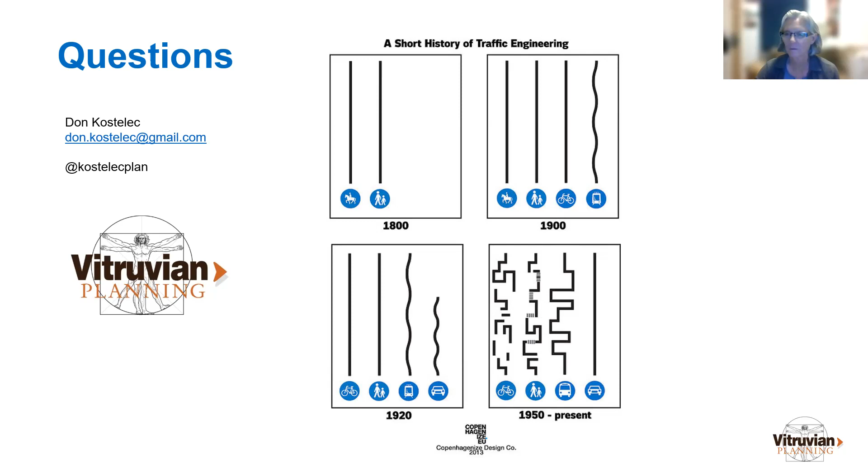Others? Brenda, you have one? Yeah, I have a question. Are there standards, or... anyway, are there guidances or recommendations on bike lanes?

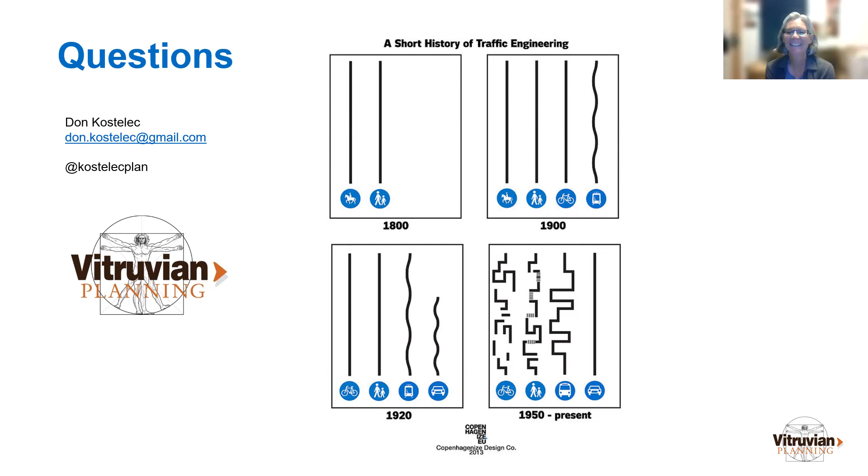There is ample guidance on bike lanes. The Federal Highway Administration Bikeway Selection Guide that I showed is one of the free ones. If you Google that, it's published in 2018, and it has a great matrix showing the speed of a road and the traffic volumes, using those to suggest the most context-appropriate bike facility. For example, any road over 35 miles an hour, research tells us a standard bike lane doesn't provide the necessary safety. It also tells us that about anything over 4,000 vehicles a day prompts that.

That's a hard one, because if you have a road with those characteristics but it's in an existing city, building a separate pathway or protected bike lane isn't feasible. I think the design response should be to put features in the road that self-enforce desired speeds, so a road with 7,000 vehicles a day that would justify a protected lane - how do we get the speeds down to 25 miles an hour so less confident bicyclists and families can be in there.

Within those different types, in general a bike lane should be 5 feet in width. The biggest mistake I see is that where the asphalt transitions to concrete in the gutter, that can't be used for width of a bike lane. It's used very often to claim that it is, but the gutter isn't used to calculate a motor vehicle travel lane width - so why do we use it to justify a bike lane width?

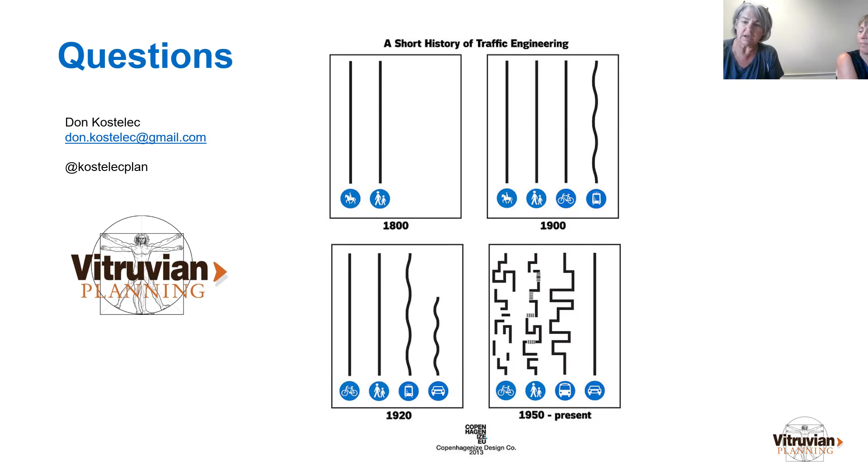There's another guide I forgot to mention that I should send you, Diane - the report we did on Orofino a few years ago, since I think we referenced it. It's the Federal Highway Administration Small Town and Rural Multimodal Networks Guide. It gets at options for the street you're describing, in terms of why just painting sharrows might not be enough, and other treatments like a bicycle boulevard. A lot of that is geared toward not just expecting paint to solve the issue if other road design features are prompting higher speeds by motorists that make it uncomfortable. I don't know the characteristics of that particular street, but I'd recommend looking into the Multimodal Networks Guide. It's endorsed by the Federal Highway Administration, so it should give you confidence to apply it.

It also has tables that talk about the speed and volume of roads in terms of appropriate context. Brenda and Don, I think it's important for you to know, they're talking about a road that we walked with them last week or two weeks ago when we were there.

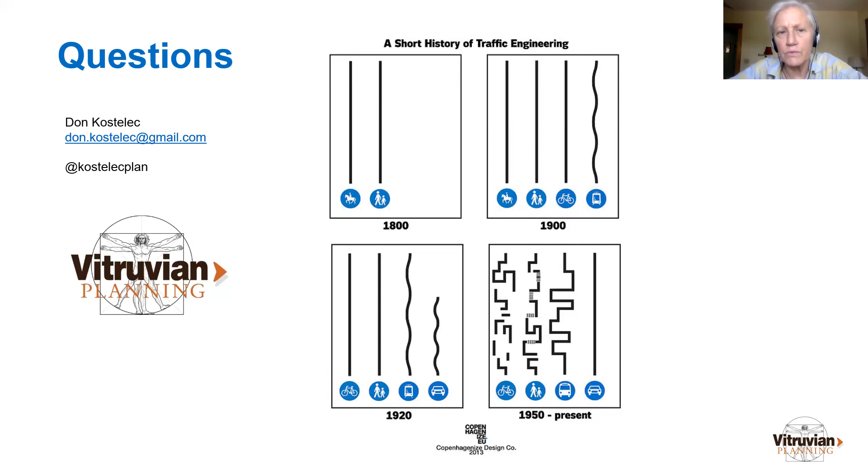We were recommending - and I know it was a lot of information for you guys to take in, Brenda - treating that whole road as a bikeway, which is kind of what Don is talking about when people call them bike boulevards. You've identified that as a bike priority corridor, even though it's a low volume street. We identified three segments because it's engineered so uniquely in each.

So there's a section, Don, where we recommended just sharrows because it's real local, low volume, and has detached sidewalks. There's another section that needs advisory bike lanes because there's just not enough cross section. And then there's a section where we think they could put in bike lanes in both directions.

I don't know if you guys remember, but I talked a lot about the need for signage - not just the paint, but signage and education for the community to understand what a bikeway is, and that these new paints they're going to see on the ground are about improving safety and accommodating people cycling, with drivers there as a lower priority, frankly. I don't know how else to put it. So I just wanted to provide that background for you, Don, in this conversation.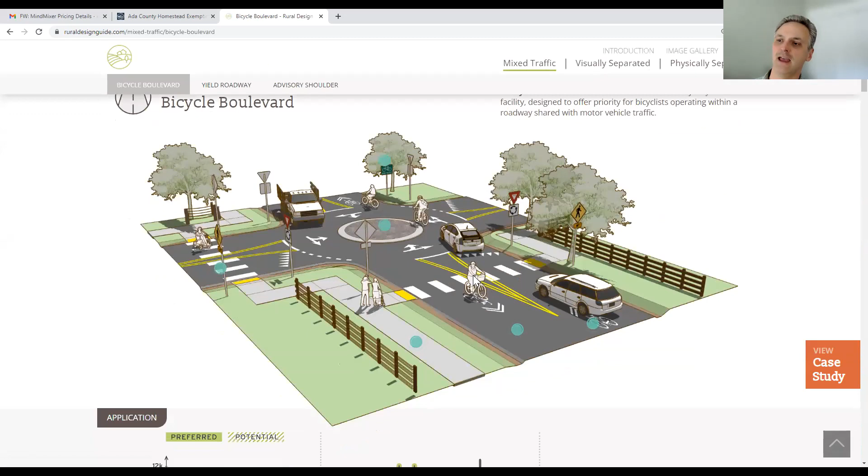Here's the example of that rural design guide I talked about. You can get it in PDF form for free - this is the physical one, but it gets at mixed traffic with some cut sheets: preferred and potential volume and operating speed, types of streets, examples, benefits, and other things that can be there. This graphic shows that unless you already have characteristics, like you described Deanna, that keep traffic at a slower speed, you might need to incorporate other things.

I know Orofino's streets are pretty tight. If I go to Hailey's streets, they're pretty wide, and without other treatments I'd have that fear. So this is kind of the full suite of things that can be considered. But it sounds like contextually you've already identified some of the right treatments based on those characteristics.

That also shows the traffic circle we talked about - we discussed potentially using traffic circles, not full roundabouts. I put the link to that in the chat, also the link to the FHWA bikeway selection document. Hopefully everyone can find that.